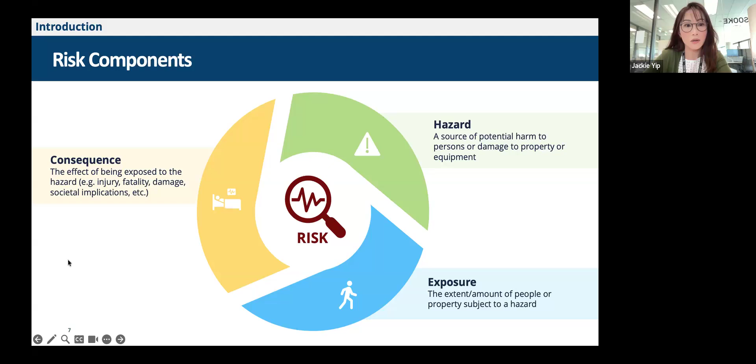And then also a function of the exposure, to what extent people or assets are exposed to this hazard, and also the consequence, which is the effect of being exposed to this hazard. So we want to really better understand ammonia leaks in terms of these three components. So our risk analysis approach, broadly speaking, as I mentioned, has two components.

The first step is really to characterize these three things in every single ammonia incident that has been reported to us in the province. So we looked at historical ammonia incidents from the period 2008 to 2024. And for each incident, we wanted to find out, in terms of hazard, what is the failure pathway? What is the sequence of things that has led to the ammonia leak? What type of system it involved, and what the concentration or leak location was, if available.

And then also in terms of exposure, we wanted to know for that incident what kind of premise it was at, what that premise was used for, the geographic region, and employment size of the business, to give us a sense of roughly how many people could have been exposed to that hazard. And then lastly, consequence: how many injuries, fatalities, or asset damage resulted from the incident. So we did that for all the incidents in this period of time.

Once we've done that, the next step was we grouped these incidents in terms of where they were happening, such that it will allow us to start to see the similarities across these different sectors, but also the differences. As I mentioned, they might all have ammonia refrigeration systems, but they might be using them in very different contexts, and operations could be very different too. So ultimately, this allows us to better understand how ammonia incidents happen in these different sectors to come up with more meaningful and tailored risk treatment actions for these different sectors.

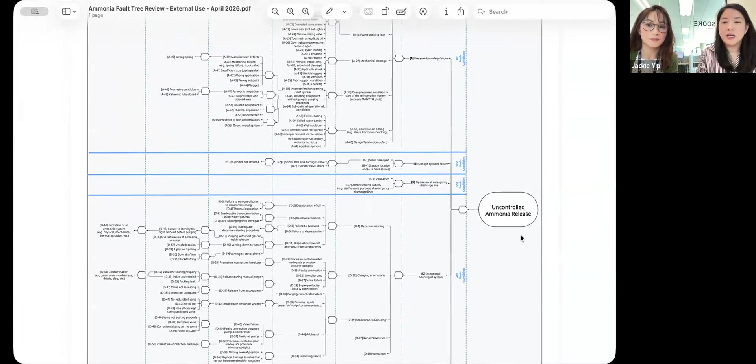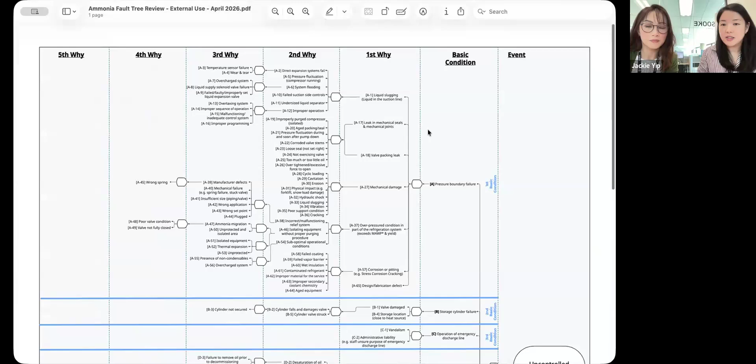As you can see, the text is rather small, but we read a fault tree from right to left, starting with our event. In this case, our undesirable event is the uncontrolled release of ammonia. One column over, you will see the basic condition, and that is the main cause of the event. This describes, generally speaking, why the event occurred. So we found 5 basic conditions that are listed below. You can see the top 3 here on your screen.

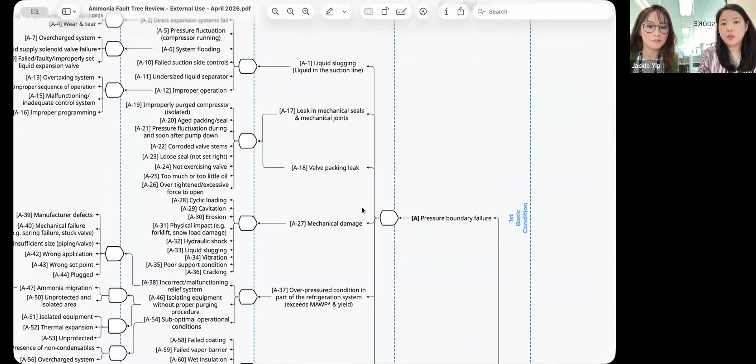But the main one we're going to use to exemplify how to read the fault tree is the pressure boundary failure event. From there, we ask ourselves the question why 5 times consecutively in order to drill deeper and further evaluate how that came about. So we may find that the pressure boundary failure occurred as a consequence of a valve packing leak, and that the valve packing leak occurred because the valve stem had been corroded. So that would lead us to this failure pathway. So keeping those concepts in mind, we will return back to the slide deck.

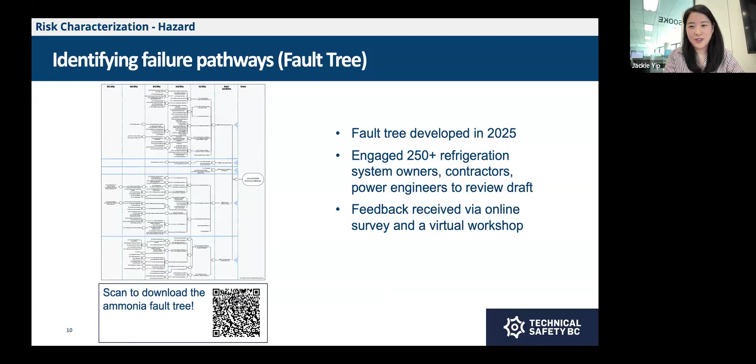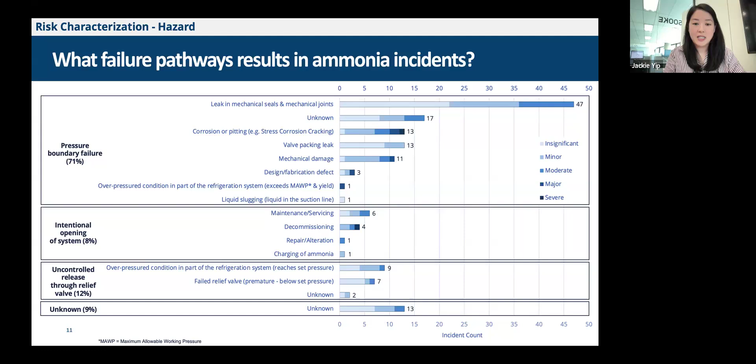Taken together, leaks in mechanical seals and joints, corrosion and pitting, along with a number of these, can be attributed to having inadequate preventative maintenance practices or not having frequent enough inspections to detect these changes that could otherwise be prevented.

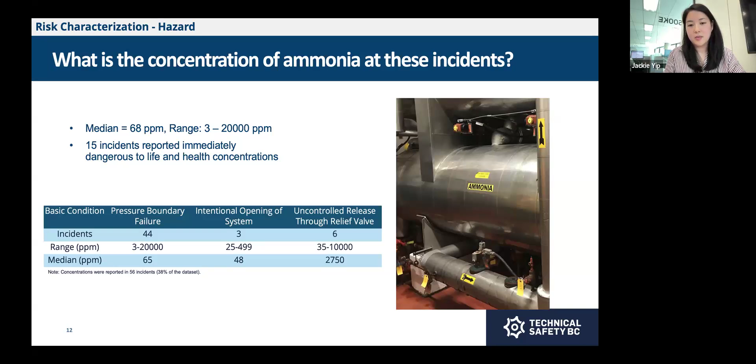And that is to be expected because in the relief valve circumstance, another component in the system has failed, thereby the final barrier for the system has needed to activate. So you do want to drop the ammonia very quickly and you want to restore the system to an acceptable pressure boundary.

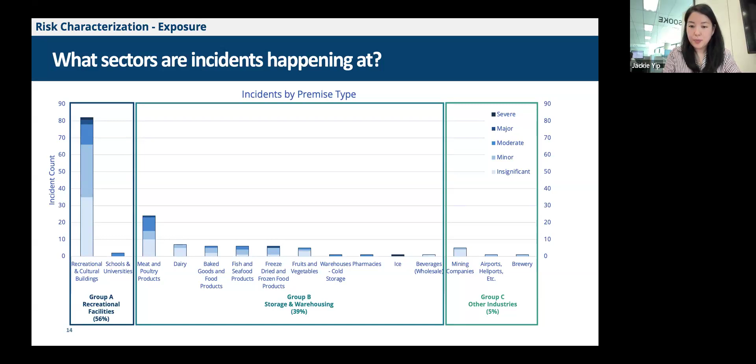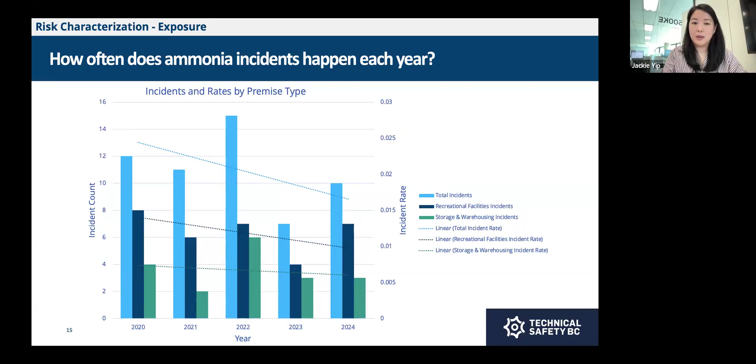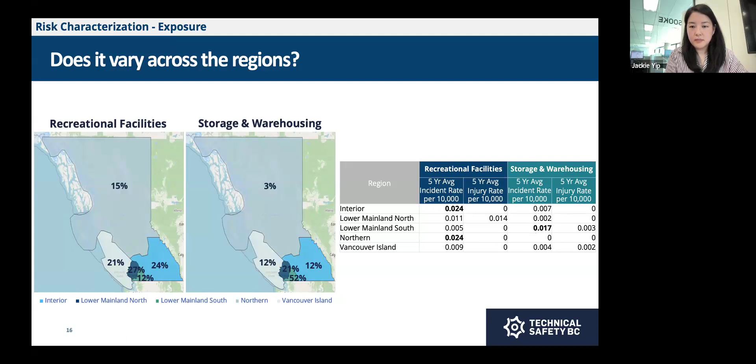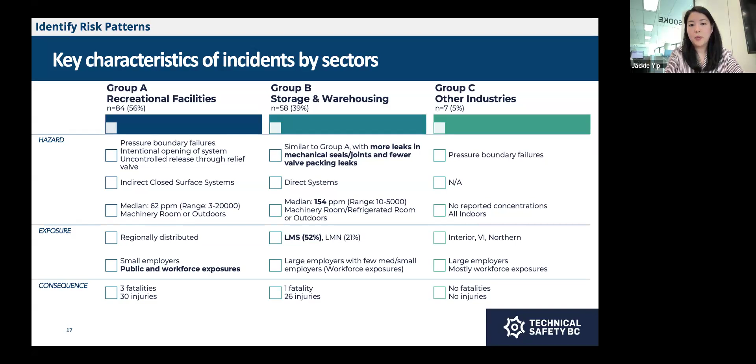Unlike the adult healthy working population who is educated and trained on emergency preparedness and ammonia awareness, public exposures in recreational facilities end up being an area where vulnerable populations can be exposed, including young children and possibly even their elderly caregivers. The consequences between Group A and Group B, again, show very similar results, thereby highlighting the need to not only focus ammonia treatment on Group A, but also moving forward on storage and warehousing.

So the importance of having preventative maintenance, including inspection frequency, as well as understanding the frequency with which we need to carry out maintenance activities for repair to prevent run-to-failure events, really is a critical thing that we want to pay attention to moving forward.

We also know that for intentional opening of the system, a lot of these types of failures can be related to employees or standard operating procedures either not being developed enough or not being updated at a frequency where employees feel confident and empowered to carry out these safely. So I'll now turn it over to Hamid to share some of our critical incidents in ammonia.

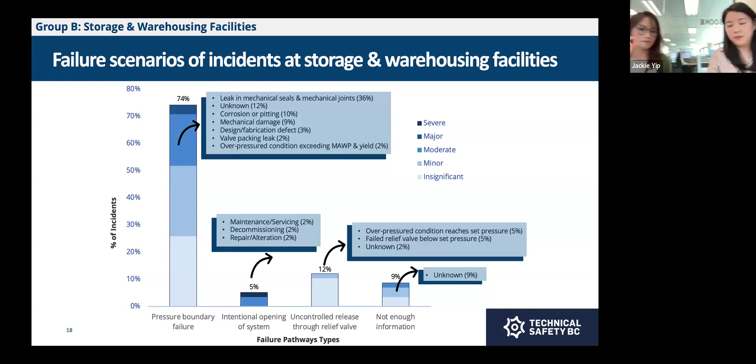Thanks, Annie and Jackie. And if you can advance the slide to the next slide, yeah, there. Thank you. So in the next two slides, I will be going over a couple of incidents that have been reported to Technical Safety BC. Very briefly, just for your information, the incidents that are reported to Technical Safety BC and are investigated, we do have the reports for those also published on our website. So you are more than welcome to take a look at those as well for further and deeper details.

The first incident I just wanted to share with you happened back in 2022. It was within an ice making facility in interior BC in Kamloops. What happened? It happened during the decommissioning and dismantling of an existing ammonia refrigeration system in this facility, which did occur earlier, about a couple of years before the dismantling process started.

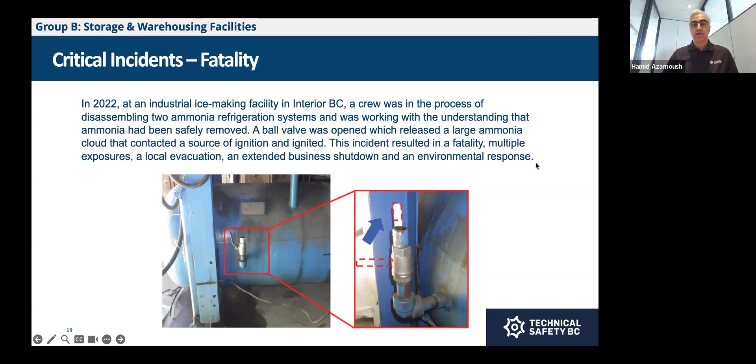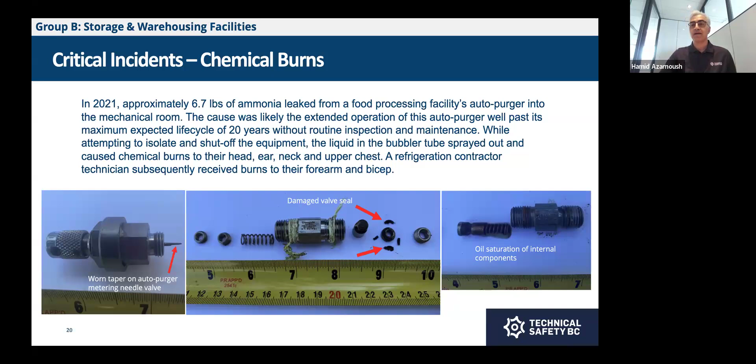I'll pass it back to Jackie. Great, thank you, Hamid.

So that wraps up our section around the risk analysis. And as I mentioned, the risk analysis result has really been the basis that shapes what we want to do next about this risk. So in the risk management process, we are going into the risk treatment planning stage right now. We are in the middle of risk treatment planning and reaching out to different stakeholders from these different sectors to run these ideas by them, not just to sanity check, but also to give everyone an opportunity to help shape these actions together.

So from the risk analysis, as Hamid mentioned last, we found that a lot of the incidents could have been prevented by having better regular maintenance, more timely replacement of aged equipment, more timely and regular testing and servicing of the equipment, and more developed SOPs for different maintenance and servicing tasks. So some of the most critical incidents could have been prevented with a more solid maintenance program.

So that is why one of the focus areas for our risk treatment is really on promoting regular maintenance as opposed to a culture of running our equipment to failure. We really want to promote something a bit more proactive and regular. And then the second area that we have identified is really to protect the integrity of our safety features.

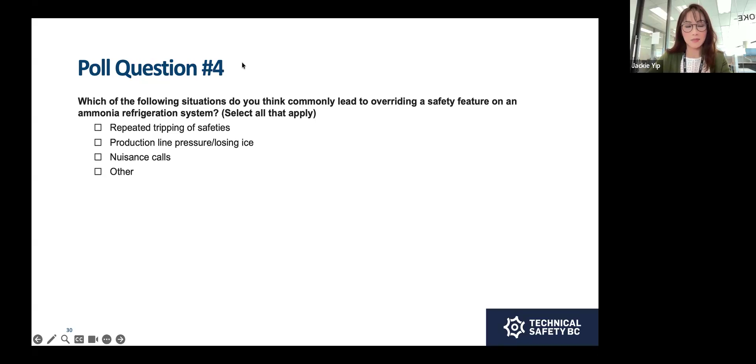So this really brings us to the last piece. Because there are so many participants here today, we don't have a chance to have any interaction or conversation or discussions about risk in general. So I really want to ask folks to sign up, provide us with your contact information to participate in smaller group engagement that we want to be hosting going forward with industry stakeholders. These will be opportunities where you can really provide your input to help us shape those risk treatment actions, not just what they are, but also how we implement them so it would make more sense for your facilities or your sectors.